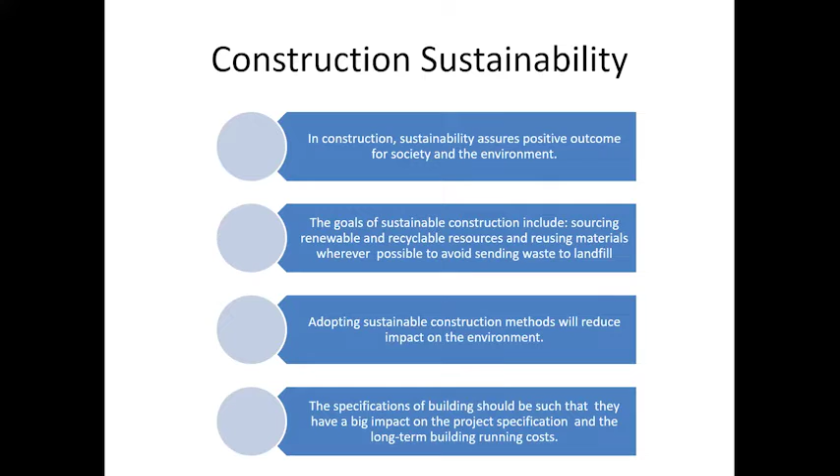I think I have already explained these points in some way or the other. So sustainable infrastructure, in exactly the same fashion, tries to use equipments and systems that are designed to meet the population's essential service needs. Ultimately, what we are trying to say is that many sophisticated equipments which require lots of energy,

lots of construction activity and lots of machines to build such things, already consume a lot of energy for us. And if you use them to construct normal buildings, you are wasting too much energy in all this. So examples of infrastructure are roads, bridges, telephone and other such things.

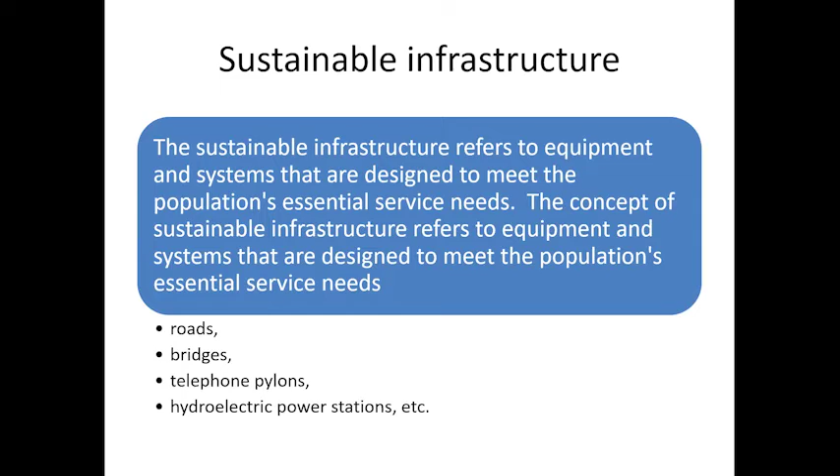The concept of sustainability deals with the issue of inadequate resources, especially energy. Now, energy is a big problem. Today, with a slight control on oil coming from oil imports or oil process prices, we already have costlier industrial activity because lots of energy is produced by oil and various kinds of furnaces and heating processes. And as it grows more, you have more and more cost on that.

Technical issues such as materials, building components, construction technologies, and energy-related concepts. Basically, it says that if you use these resources at lower cost, you can create eco buildings, or what is called the category of green building. A commitment to achieve social, environmental and economic success is the combination that makes a green building.

Now, requirements to implement sustainable construction include innovation and technology enhancement and waste management strategy and practice. This is something which if you see from Kashmir to Kanyakumari, in any big city or small village, heaps of waste are lying there, getting ruined, creating smells and that kind of thing.

And I don't think today even 10% of the waste is really converted into useful energy or materials. Very recently, I heard that we are getting waste-to-energy power plants from Germany. I think in a few months we are expecting that kind of thing. So that is one of the solutions, to use waste to convert it into useful energy.

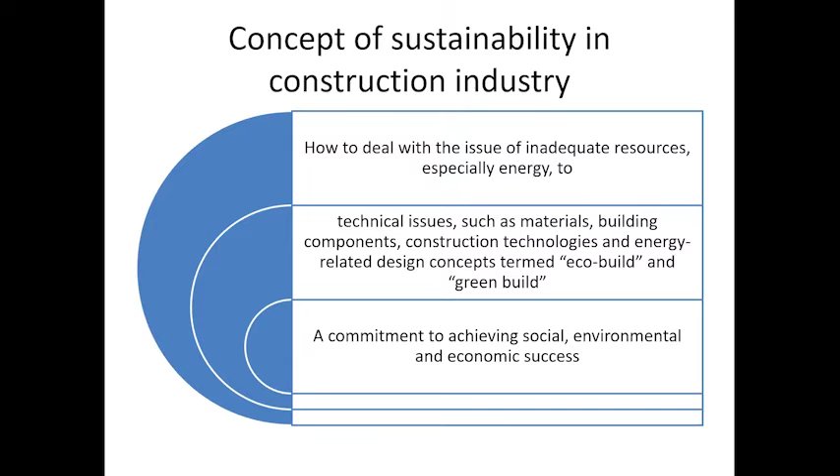The commitment to the knowledge of sustainable concepts, which are transferred to and adopted in the ways of working, thinking and learning, boosts the stakeholders. Similarly, mitigation of water wastage and enhancement of efficient water use is one of the most important requirements today, because water is in shortage everywhere. Although during rainy season we have lots of water, we don't have enough storage places where we can retain water for the whole year in many places.

So what is the definition of sustainable building materials? Sustainable building materials are produced or sourced locally. Locally means, depending upon the area, you have different kinds of local resources. So if you create those materials from those local resources, then it is considered useful. If you bring materials from a very far distance, you again spend a lot of money in transportation and things like that.

So these materials contain recycled and industrial waste materials and byproducts. Sustainable materials have a lower impact on the environment and are thermally efficient. I will show you some examples in a minute.

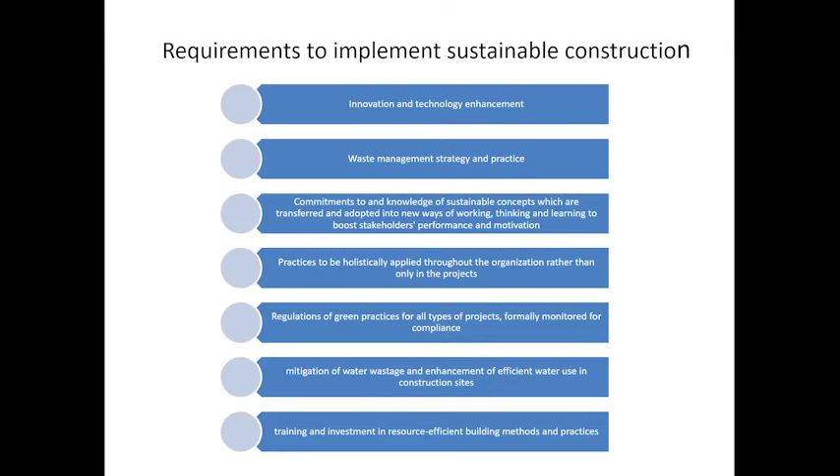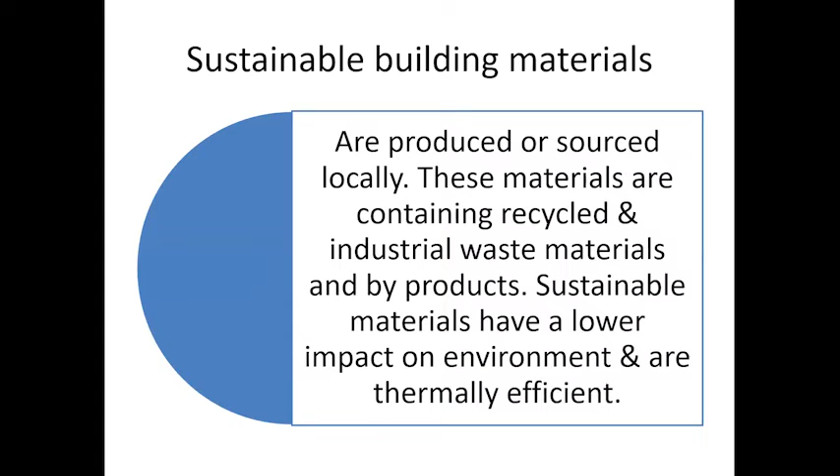Second, what is the need of sustainable materials in construction? The materials are moisture resistant, thus need much less maintenance. Energy efficiency: the use of sustainable materials helps to reduce energy consumption, and durability. So moisture resistance, energy efficiency and durability. Sustainable buildings are known to last longer and require less maintenance, thus saving cost in the long term.

Next slide, please. So here I have given you the next slide, with a list of at least 8 sustainable materials. Bamboo. Now, bamboo is something which grows with natural resources.

If you see some bamboo trees, almost 8 to 20 meters long, they can be directly removed from there, and bamboos have, depending upon the place, very good strength. If you really use this bamboo for construction of houses and other things, then that is the real use of natural materials.

Precast concrete slabs, or today if you see in most parks where you have the children's area, we have cork-based floors, so that if children fall, it doesn't cause damage to their body. Straw bales, recycled plastics, reclaimed wood, reclaimed recycled steel.

Now my question here is that although I have listed these things, how much of these can be used in construction in big cities? That is one of the questions. Yes, in remote areas, other things, they are being used.

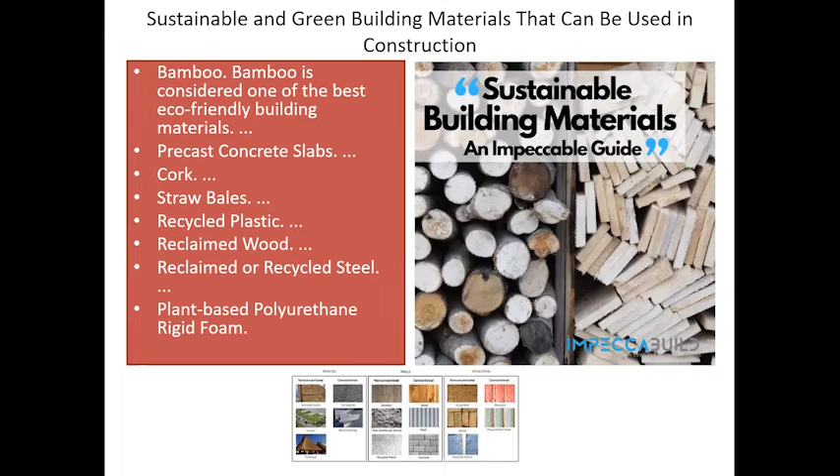Some of these examples I have already shown in this picture. You can see lots of tiles can be made from these waste materials. You can make hollow woods and other kinds of things with that. So a list of all these materials is listed here.

Another important thing is how we can make our houses safe and at the same time free from moisture and insects and other things. So one of the biggest problems today is sound.

With the increasing population and increasing number of vehicles and transportation, it is very difficult to stay in a house which is next to a so-called road. So noise pollution is one of the biggest things.

So today what we need is special kind of toughened glasses which have special layers of soundproofing, and seal-proof doors, because doors are opened quite often around the day, and that is again a source of sound. And the third thing is safety from fireproofing.

Fireproofing is now one of the very important things which today requires the first important certificate when a building is ready—whether you have used those kinds of technologies to make it fireproof or not.

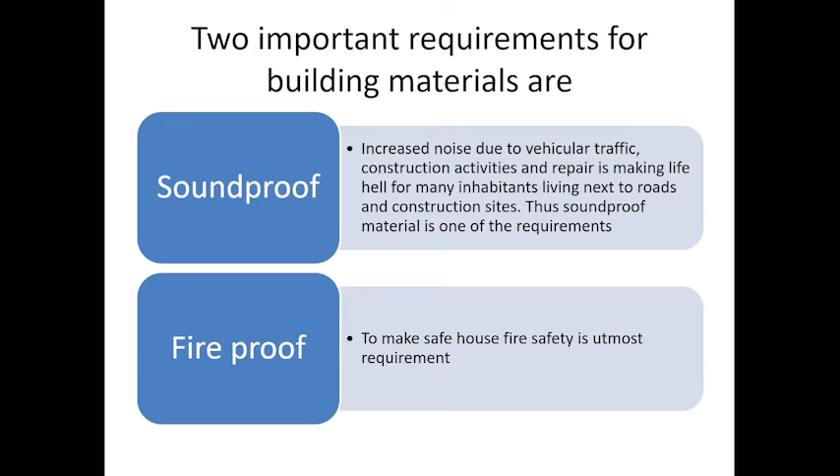I was just searching and found a few companies—some of these have an origin in Germany, but there are 2 or 3 companies now making these products in India, and there is a very big market for such products.

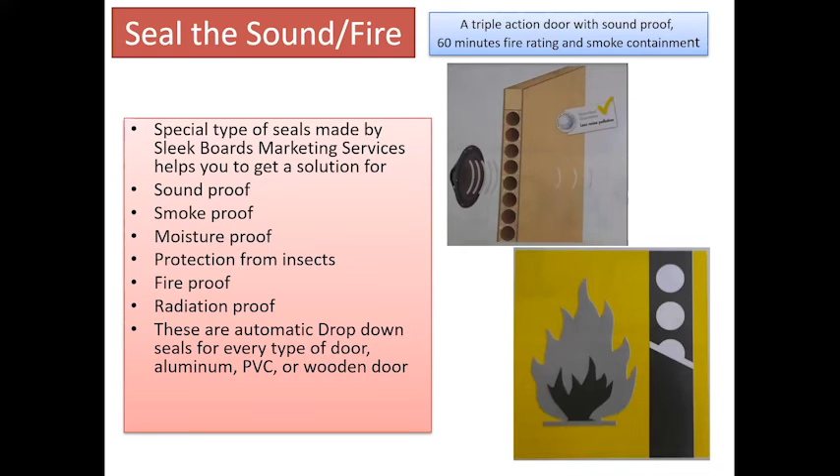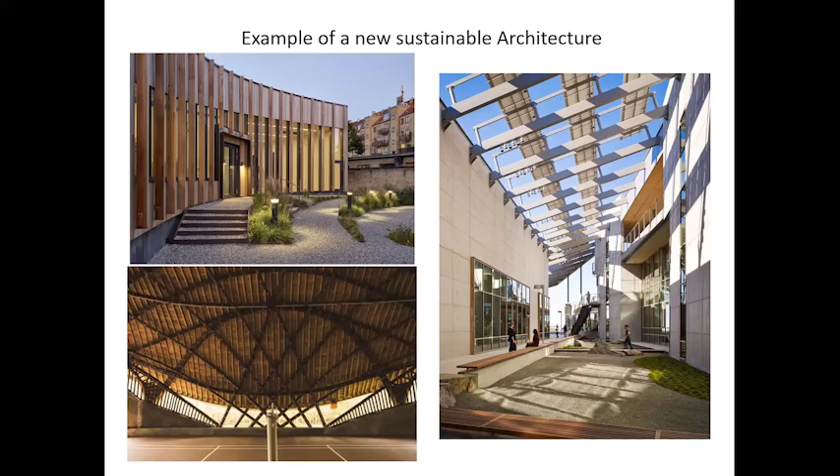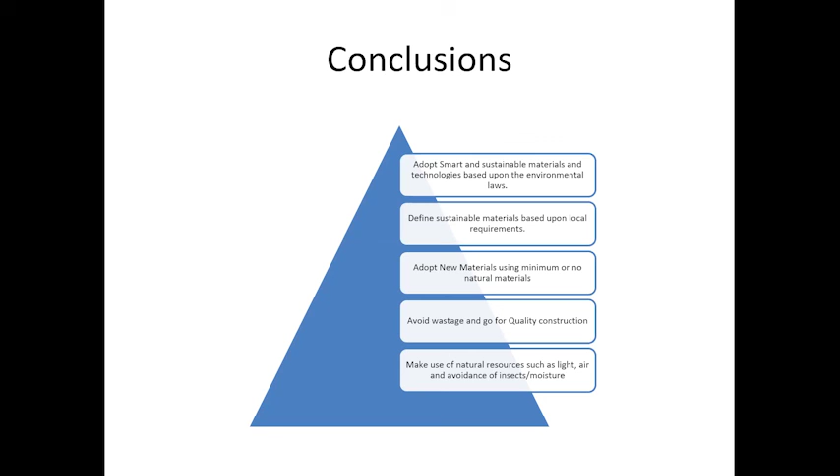So that is the conclusion: adopt smart and sustainable materials and technologies based upon environmental laws, define sustainable materials based upon the requirements, adopt new materials using minimum or no natural materials, avoid wastage and go for quality construction, make use of natural resources such as light, air, and avoidance of insects and moisture.

I have very briefly explained what these things mean, and I hope I am able to add a very small percentage of knowledge to all of you, and if even a few percent of that is actually followed, that serves the purpose. Thank you very much.